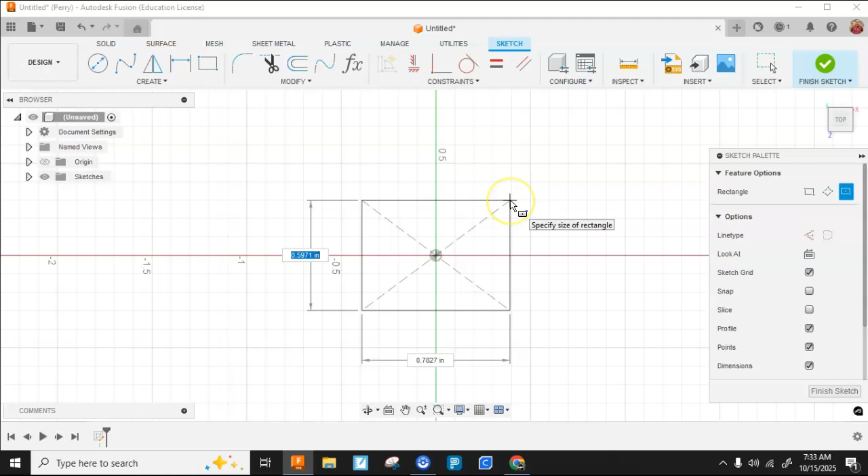I'm going to start by creating a sketch. I'm going to choose this bottom plane. It is essential that I select a center rectangle, that way I'll have an axis going up through the top. I'm going to enter 1.252 for the depth, tab, 1.252 for the width, tap enter, finish sketch, and then extrude that up.

I'll extrude that up 0.756.

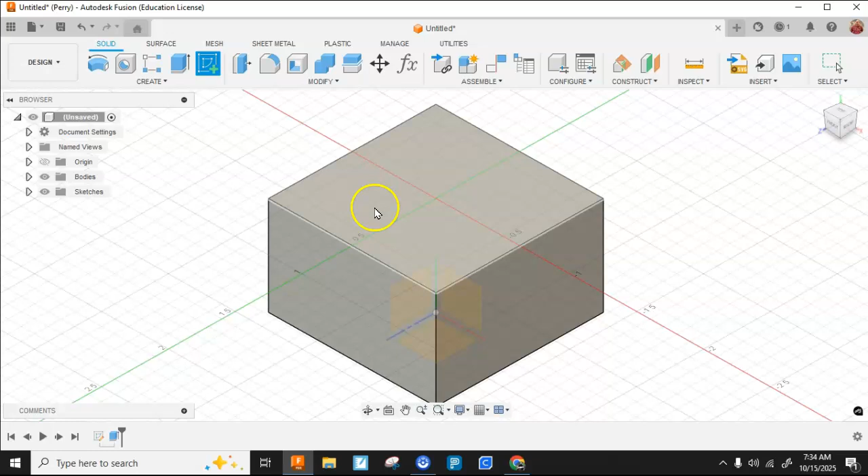Now I have an axis going up through the middle, so I'm only going to have to put one stud on there, and then I'll be able to pattern that. I'm going to create a sketch, choose the top of the block I just created, and put a circle on there that is 0.371 in diameter. I'll hit enter.

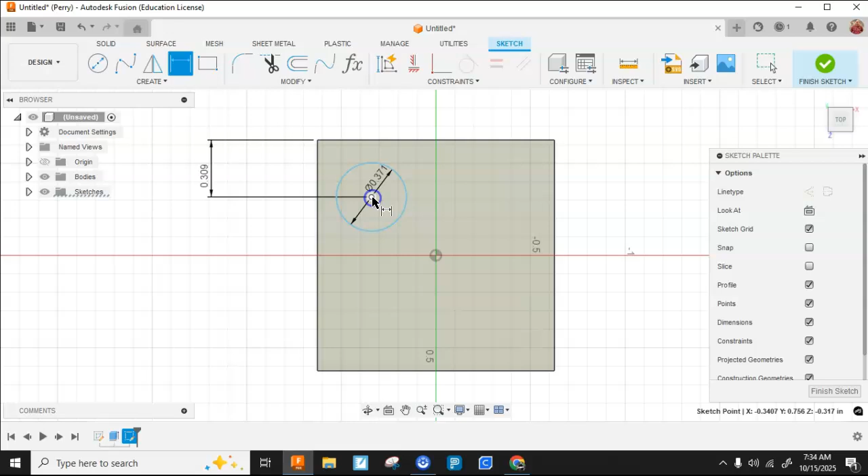I'm now going to position it perfectly. I'll hit the sketch dimension button, tap the circle and then the line, dragging out so I can see what I'm doing. I'm going to hit 0.309, enter, then tap the circle and this line, drag up just so I can see what I'm doing, and hit 0.309.

Alright, I'm going to go ahead and finish that sketch. I'm going to extrude that up 0.2.

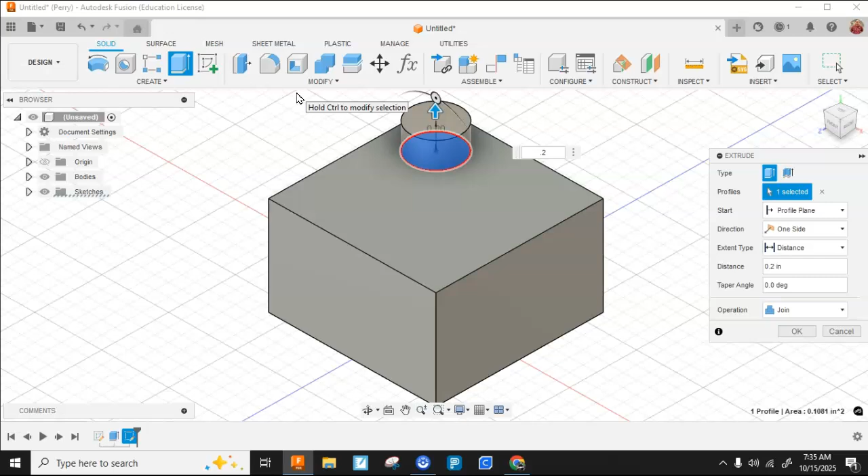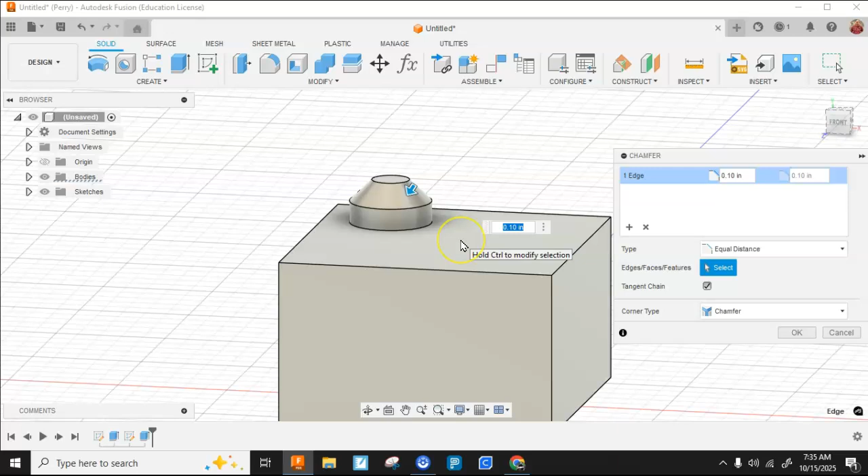And hit enter. I'm going to go ahead and put a little chamfer on this now because it helps them fit together. I'll right click on that circle, select chamfer, and go 0.05 on my chamfer, just a little shoehorn to help it out. I'm going to hit OK.

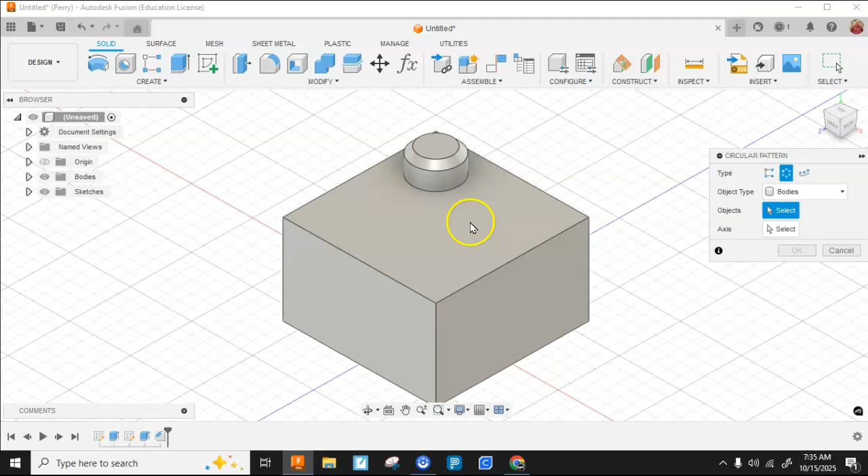Now I'm going to create the others by a pattern. So I'm going to come up to create, down to pattern, and I'm going to do a circular pattern. I know we're working on top of a rectangle, but it is a circle. Now the object type I need to change to features, and I want to select both the stud and the chamfer, that way I don't have to do any other work.

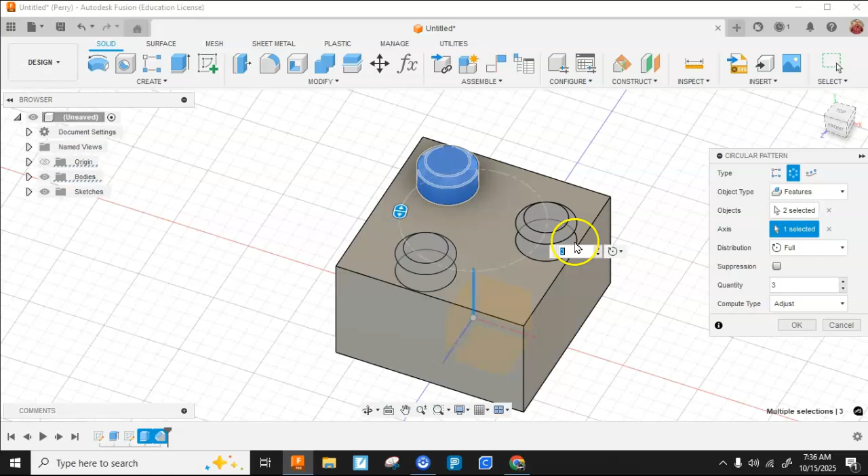I'm going to hit axis, hit select, and then turn this so that I can get that center axis. Well, that has 3 of them. I'm going to change 3 to 4 and hit OK.

I've now done the top. That top will fit into a Lego Duplo on the bottom. So now I'm going to work on the bottom. I'd point out to you that I am done with numbers - I'm going to use constraints.

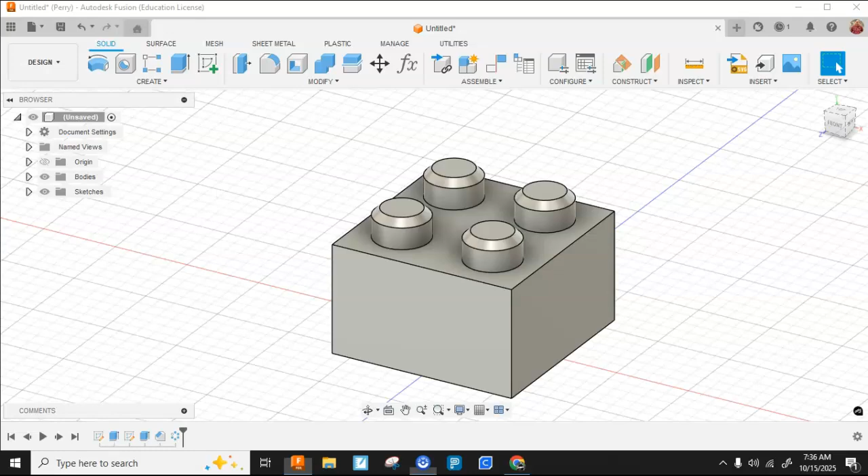Alright, so on to the bottom. I'm going to go ahead, first I'm going to shell this. I could draw down here and do an extrusion as a cut to get rid of this in here, but instead I'm going to use the shell command.

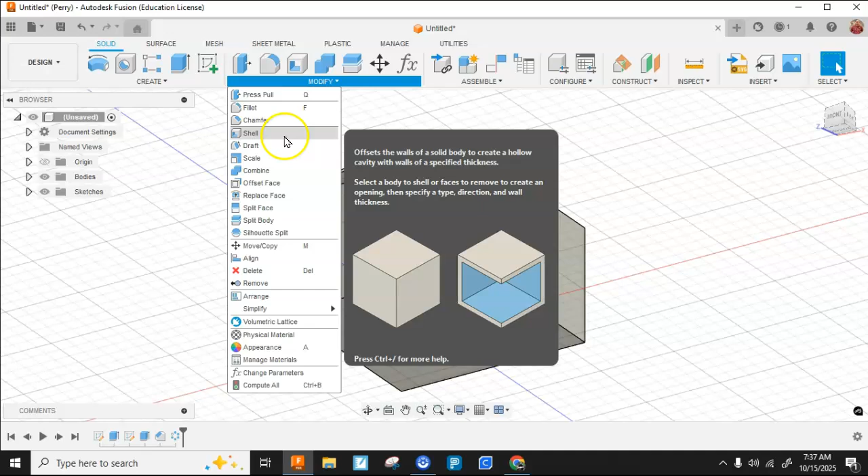I'm going to go to modify, and let's see, shell. It wants me to choose the faces of the body. I'm going to choose this bottom face, and make it 0.1. Now I know that is thicker than the plastic that makes up the Legos, but our plastic's a little weaker, so trust me on that one, it works.

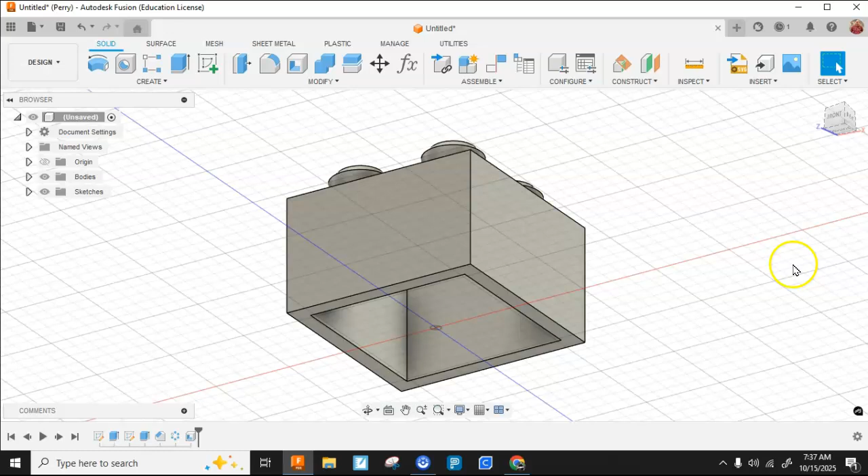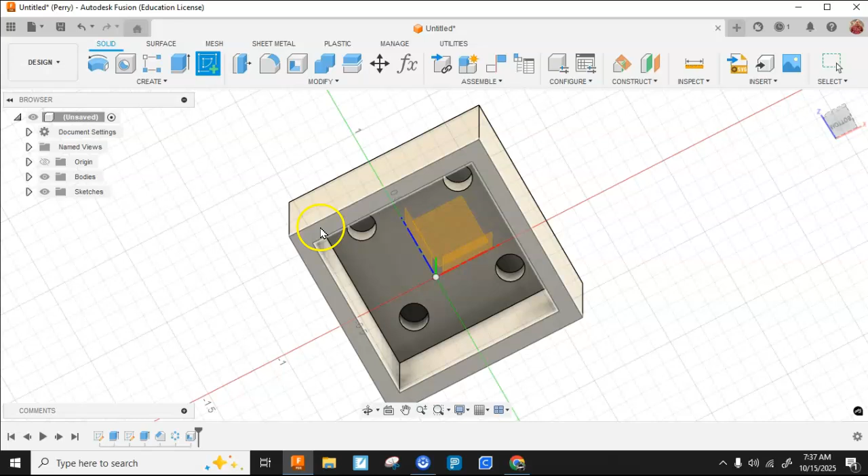Alright, now I'm going to do this bottom in one sketch and one sketch only. You cannot have multiple sketches in a row here or it's going to go haywire. So I'm going to create sketch, and then very carefully choose this bottom plane. Note that this little rectangle cutout is selected, so I'm going to click on that.

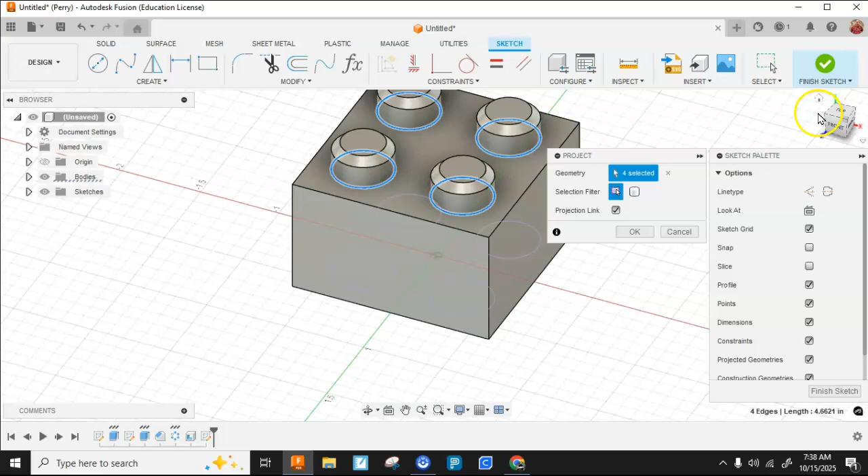And before I do anything else, I can't really see my geometry from the top, so I need to project it down. I'm going to go to create, project, and I am going to project. I really only need one circle, but I'll project them all - those 4, the outer rings, not the inside circle, but the outer ones, down to there. I'll hit OK.

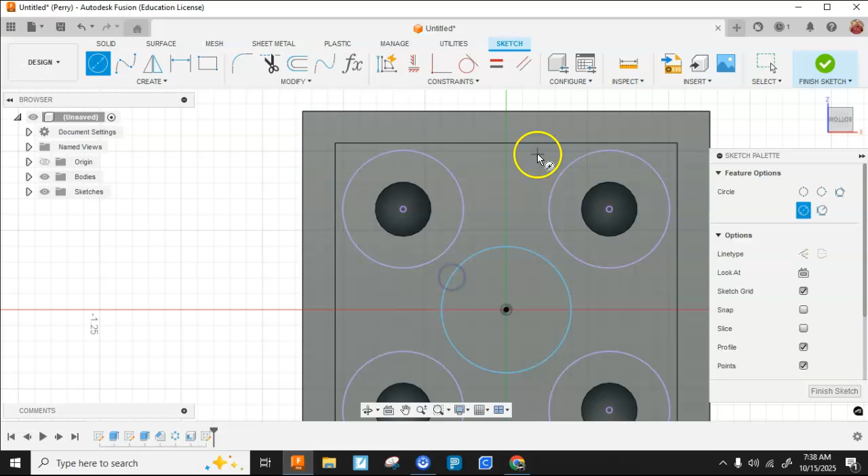I'll come up to my nav cube and hit down there, and now I need to hug this. Alright, so I'm going to start with the center peg. I'm going to use 2 concentric circles for that, locking on to the center point. I'm going to make 1, and what I want that to do is touch those. So I'm going to use a constraint called tangent - I'm going to touch this one and then this one.

And you can see that snuggles in there nicely. I'm now going to add a second circle, and understand that this is arbitrary. What I don't want to do is waste a bunch of plastic and print that solid. So when I say arbitrary, I'm picking it out of thin air, looking for what looks like the right thickness.

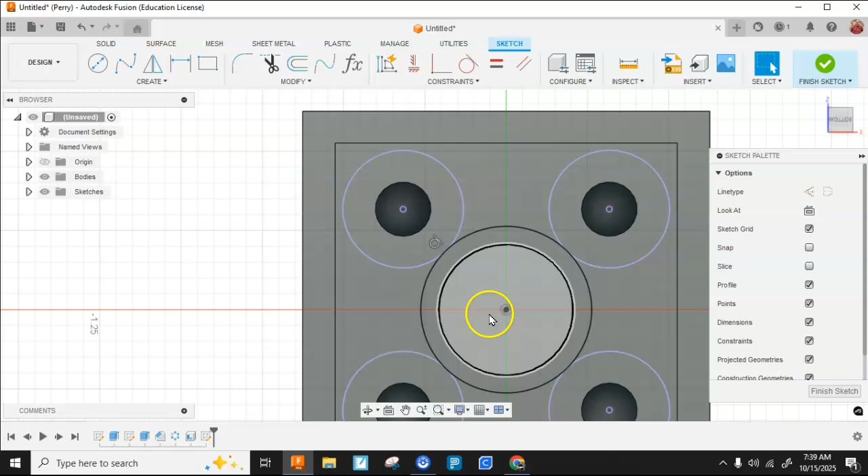The next thing I want to do is, if I placed it on here like this, it would be able to twist on just that center peg. So I actually have little fins that are going to go here and here. Now they are rectangular in the Lego, but I'm going to make arcs, so I'm going to use a 3-point arc.

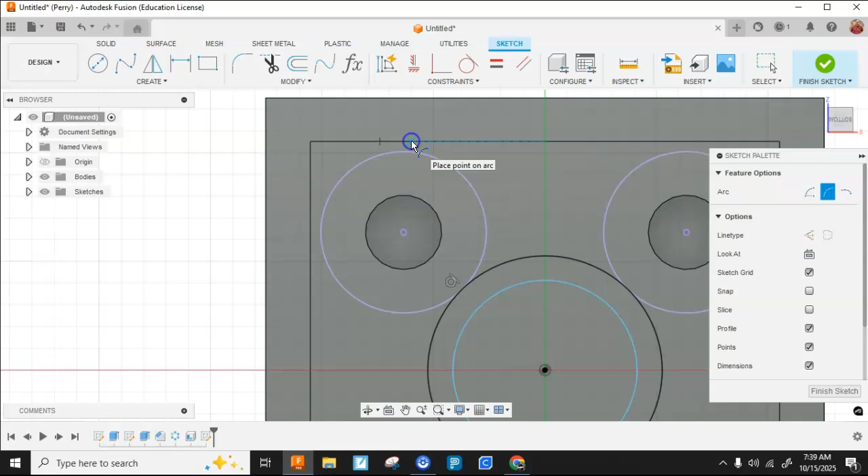I'm going to come up here and click, drag over, .07 or so around there, and then slightly come down and stop, and then hit OK. Now I want this to be directly above the center of this circle, so I'm going to use the horizontal vertical constraint. I hit horizontal vertical, click this, and then click this, and it's going to move me over. I also want that to touch this, so I'm going to use the tangent constraint.

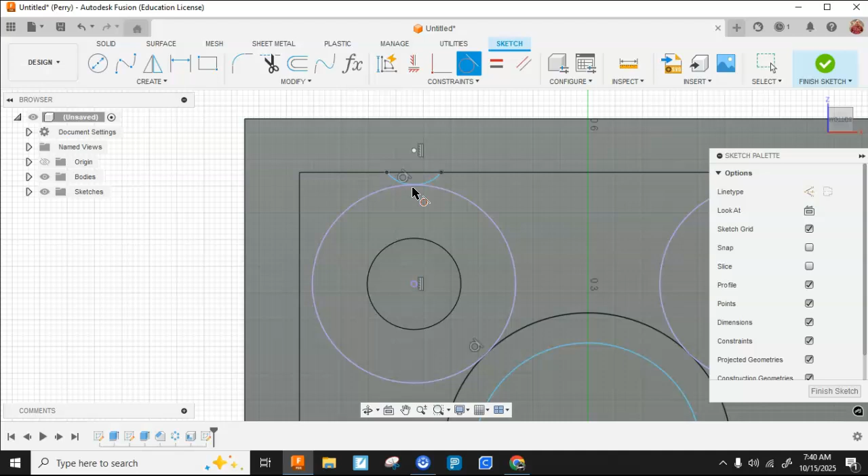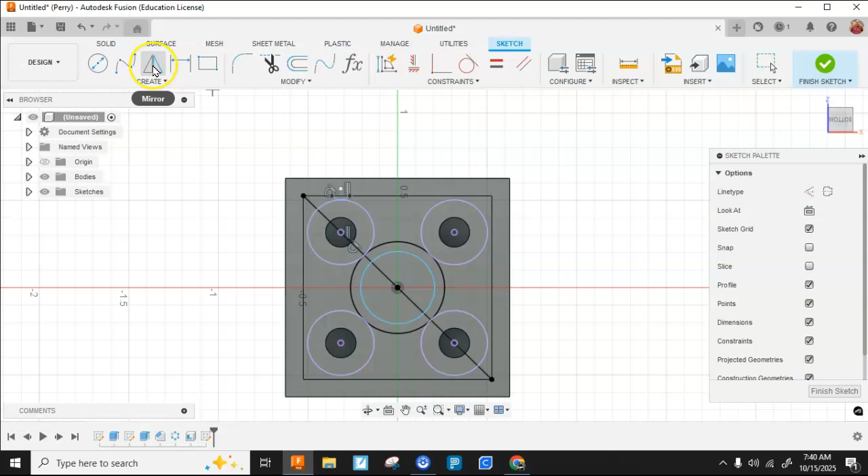Alright, so now I want this to be over here. Rather than doing that again, I'm going to draw a line in there and reflect about that line. So I'll draw a line corner to corner, snapping onto those corners, so it's a perfect 45 degrees. I'm then going to use the mirror command, choose that, and for my mirror line I'm going to choose this one. I'll hit OK.

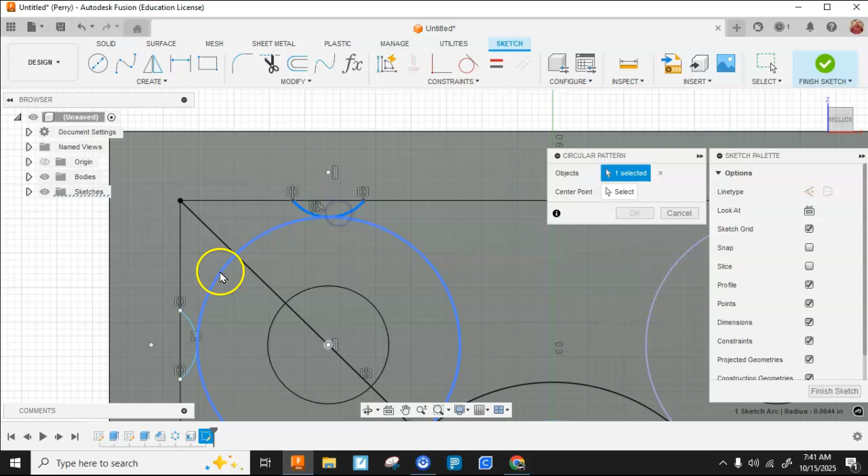Now I'm going to pattern again. So this is a circular pattern. I'm going to choose this one and this one, and then for my center point I'm going to go back to this original origin. I'm going to do 4 of them. And then when I do 4 of them, notice that these are all perfectly positioned. I'm going to go ahead and hit OK.

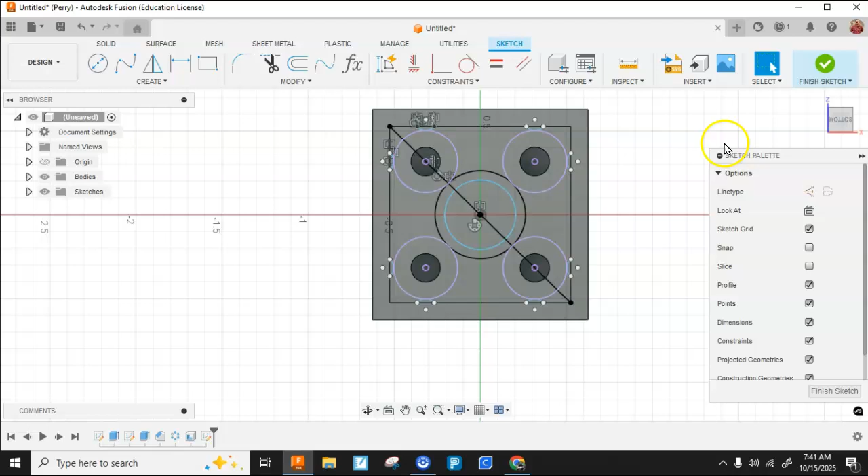Alright, so now I'm in business. I'm going to go ahead and finish my sketch. I'm now going to do some extruding. The first thing I'm going to do is extrude this center peg. I got to click on it twice because I have that line going through there.

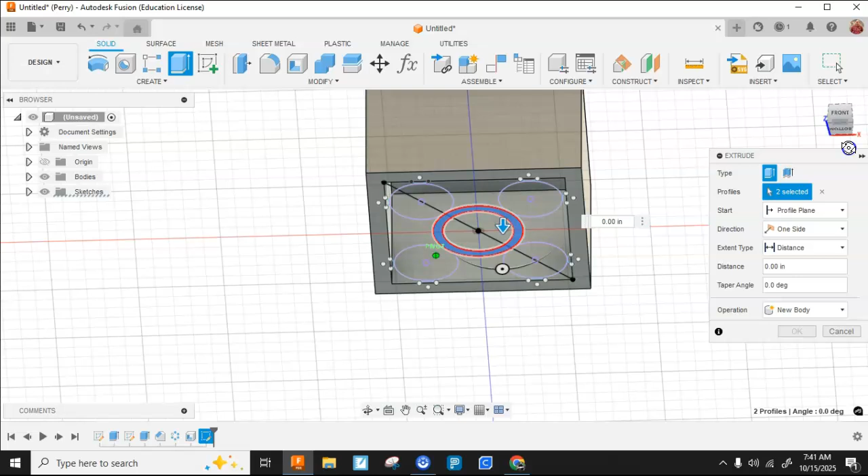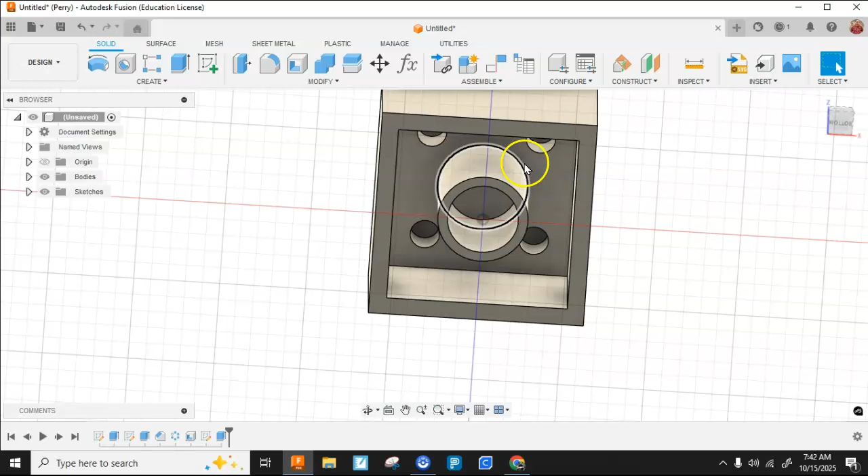I don't want to do any math, so all I'm going to do is extrude it not to a distance, but to where it comes here. I'm going to go to object, and then extrude it up to that plane there. That'll go as a join. I'm going to hit OK. So I don't have to choose to go a distance, I don't want to do math, I'm not using any numbers here. I'm just using constraints and things like that, so I'm constraining that to go up and meet the top.

Now I got to do the fins. The fins have disappeared, but they'll easily appear when I click over in my browser, drop that sketch, and I'm going to put the eyeball on in that last sketch. So now I'm going to extrude.

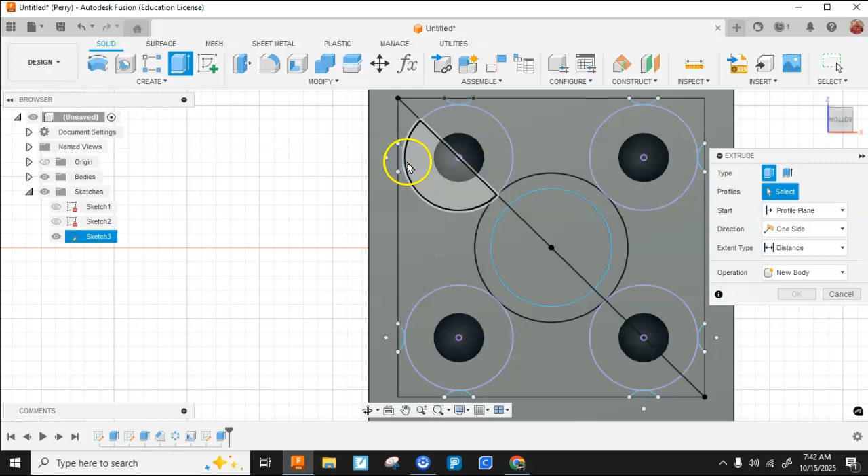I'm going to extrude this one. I'm going to choose all 8 that I just made, this one, and this one. And then I'm going to extrude that upwards. So I'm going to drag that arrow, get it going upwards, which is negative, and I like going to negative 0.2, because that's the height I made the studs. That's enough to grab it.

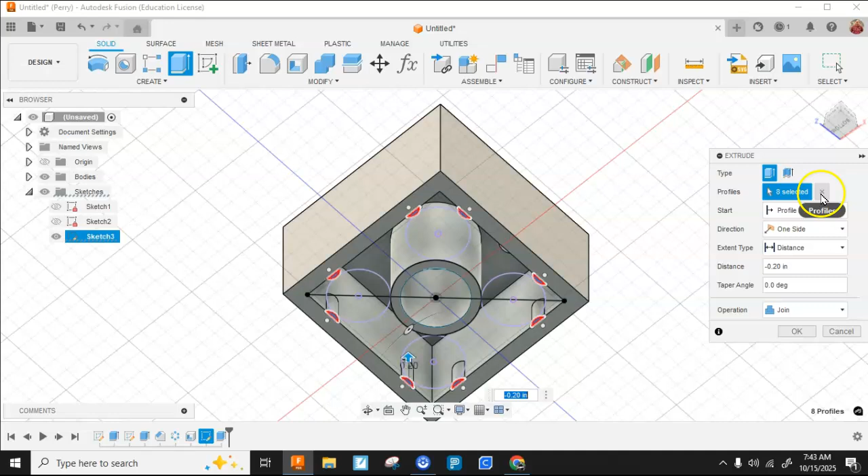And that's a join. I'm going to go ahead and turn that sketch off, and I'm going to realize that this is a working Duplo.

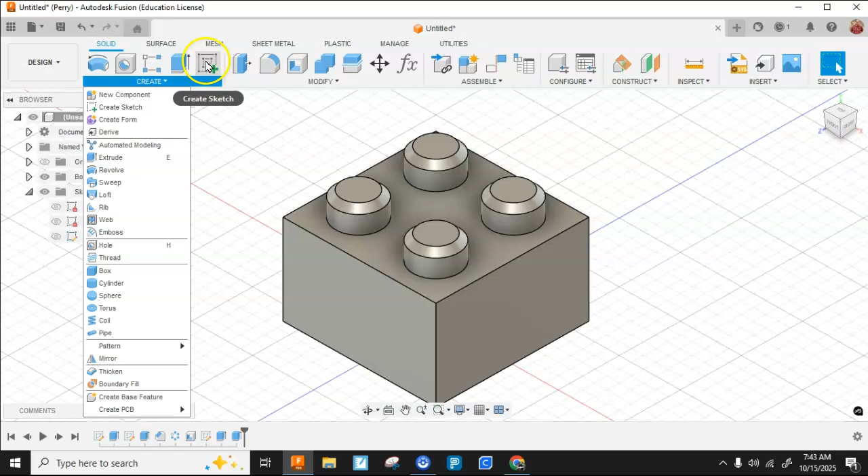The last thing I need to do is add my name to it, or my initials. This helps us keep going, keep clear. So I'm going to sketch right here on the side. I'm going to create a text box.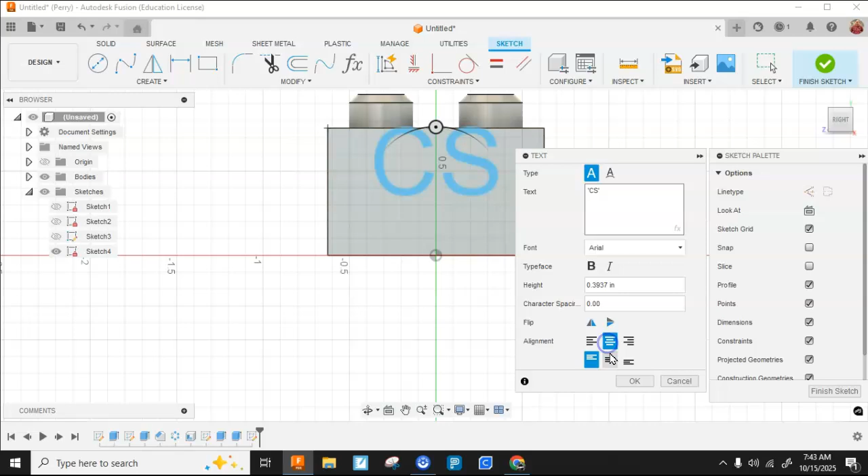I'm going to grab, it's going to give me some sort of strange message. I'm going to drag a box out corner to corner. I'm going to put my initials, CS. I'm going to center, align it to the center and align middle so it's nice and in the middle. I'm going to hit OK.

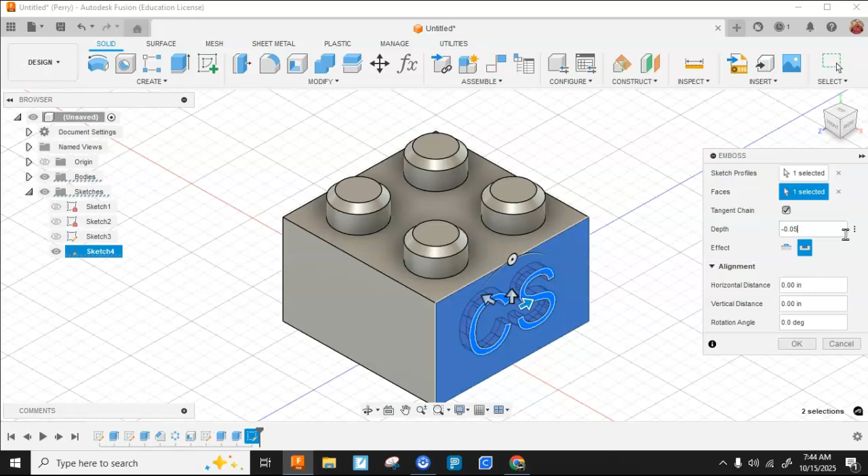I'll finish that sketch. Then I'm going to go to emboss, and choose that to emboss. It's embossing into this face, and I'm actually going to deboss it. Now, I made it 1/10 of an inch thick, so I'm going to go 1/20th, halfway, so I'm going to do negative 0.05. I don't want to punch all the way through, and it's going in. The reason I want it going in is that way it can sit next to another block. If it weren't going in, it would stick out and two blocks couldn't be beside each other.

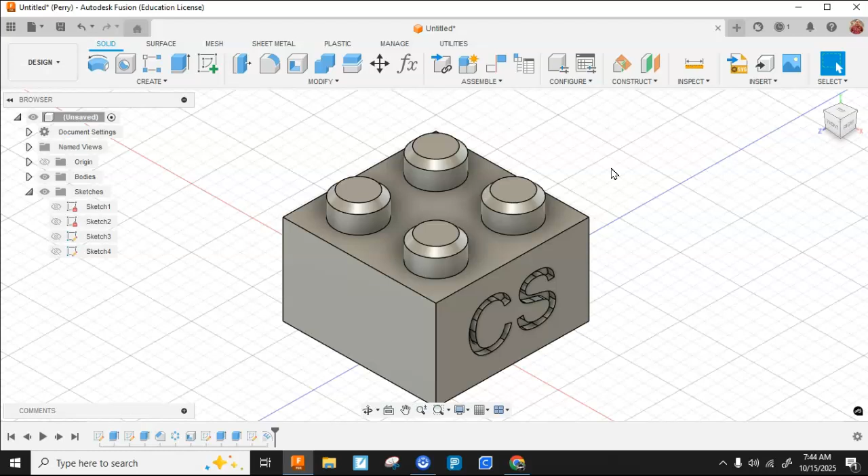But that, children, is about as quick as I can make one. If I'm not talking and I'm just going, I can go a little under 3 minutes. I tried to explain what I was doing, but obviously you'll be able to reference this as you go. But this is full on, all the tricks, and about the quickest technique. I didn't do anything for learning, I just showed you the lean way of making it.